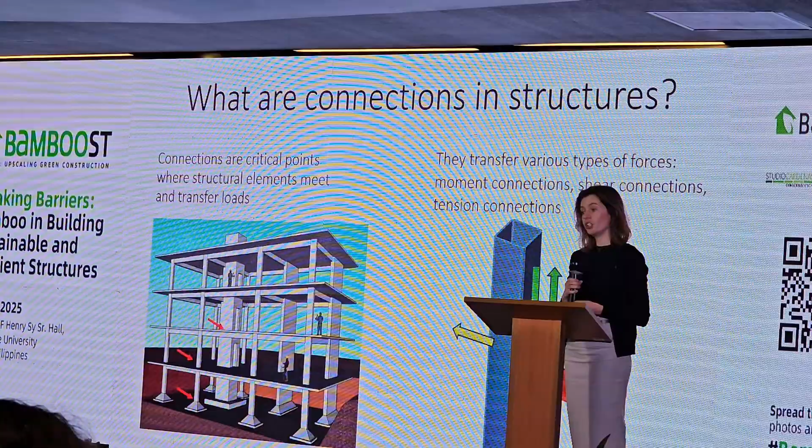Before we delve into this presentation, I want to bring us all on the same page. So what are connections actually? Structures, what are joints? What do we mean by this? So connections are critical points where structural elements meet and transfer loads. And we may, for example, have a connection between a beam and a column. And connections can transfer different types of loads. We may have tension, shear, or, for example, bending.

So why are connections important? Why am I here talking about connections at all? Connections happen to be critical failure points in structural collapses, not always, but quite often they are. And connections can cause a structure to collapse due to poor design, so connections that are not strong enough, too brittle, or not stiff enough.

Lack of environmental protection, so we may see corrosion in metals like steel, or degradation in bio-based materials like bamboo. And poor workmanship, so lack of skills, that's a big problem, and cost savings. So, for example, why do 10 screws if we can save and use only 2? So that means that in many collapses, connection failures are the root cause, even when the structural elements themselves are well designed.

What this means in practice is that, imagine that you have two shorter bamboo poles and you want to create a longer element. So you connect them at the ends, and now you want to pull those poles apart. So it's not just the bamboo strength that is relevant, it is the connection strength that has to be as strong as the bamboo itself if you want to utilize the bamboo tensile strength in that case.

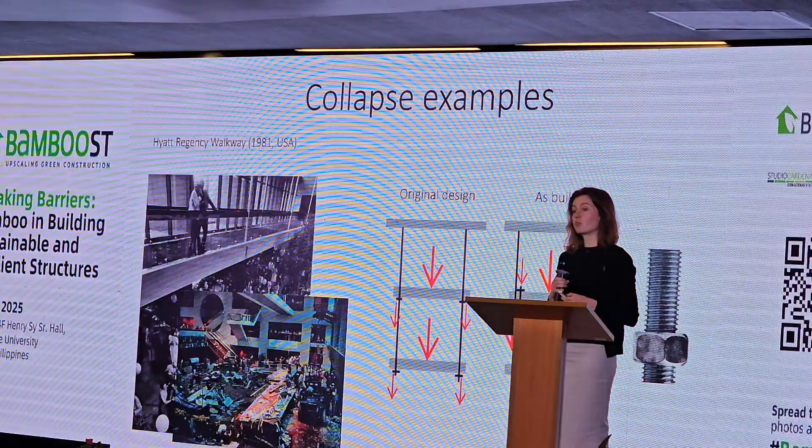So 2 more slides before we go into bamboo, I promise. This slide shows a tragic example of the importance of connections in structures. So in 1981, in a hotel in the US, 2 suspended walkways collapsed, killing over 100 people. In the original design, the walkways were supported by a single continuous rod in the connection. But in the as-built solution, there was a slight change, and suddenly 2 rods were used. And this small change caused doubling of the force on the connection, and it led to a massive loss of life.

And another example of the importance of connections is a collapse of a bridge, and here 46 people died. And this is an example of the importance of environmental considerations in your design. So this was due to stress corrosion cracking, which is a form of steel corrosion.

Okay, let's talk about bamboo. So connections in bamboo are quite tricky. We engineers like to work with flat surfaces and square corners, and bamboo has got none of those. It's round and hollow. The walls are relatively thin, about 10 millimeters, and there's not much material for the connector to engage with. And it's not uniform in size, so it's not perfectly round, it's tapered, it has nodes, and the nodes are not at the same distances, etc.

And on top of that, bamboo splits, it cracks very easily. That's because the fibers in bamboo run in only one direction. And if you're trying to insert any type of fastener into bamboo, it's very likely to split because you're effectively pulling those fibers apart. And it's not just the load, the stress that causes the cracking. It's drying itself that actually can cause bamboo to crack.

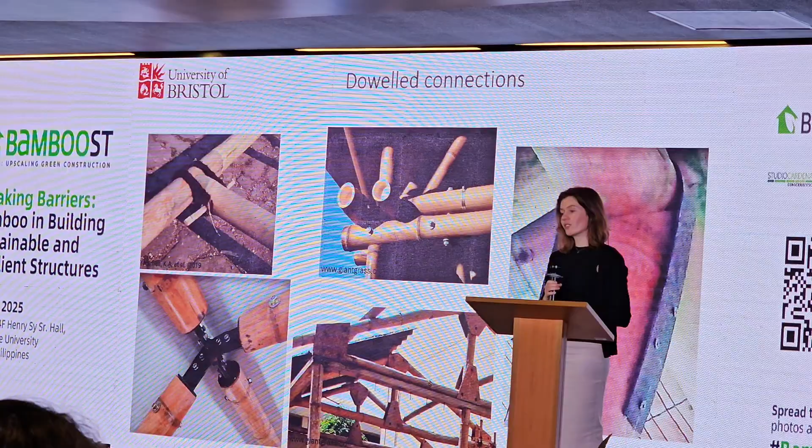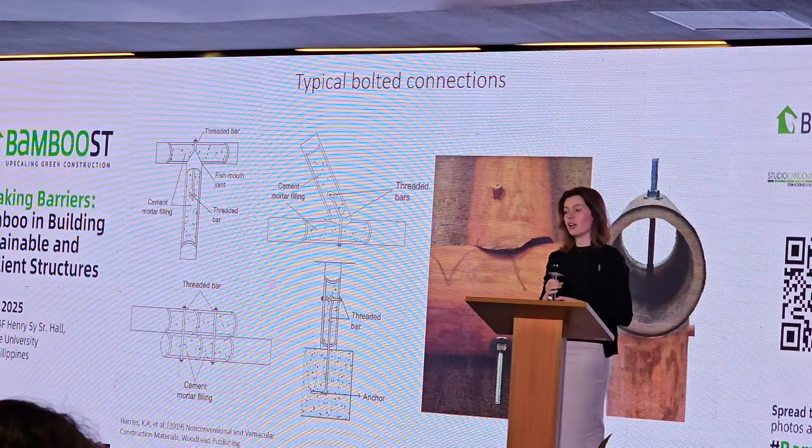And the interesting thing about this connection is that it's not just the bolt, it's the mortar infill inside the nodes. So we use that cement mortar to kind of compensate for the lack of material. So like with wood, we would have a solid section, with bamboo, because it's hollow, there's not much thickness for the fastener to engage with. So we compensate with the use of cement mortar inside.

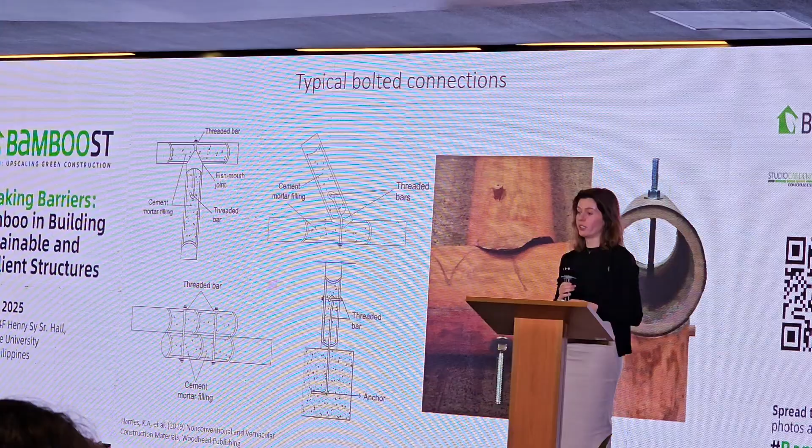And here are some pictures that I took in Colombia of this type of connection. And again, it may look a little bit different in the Philippines, but this is kind of how they do it in the place that I visited. And the cement is not always there, it kind of depends on the strength you want your connection to have. But without that, it's very likely that it might split. And you can also see how that mortar is being inserted into the internode, so there's that hole in front.

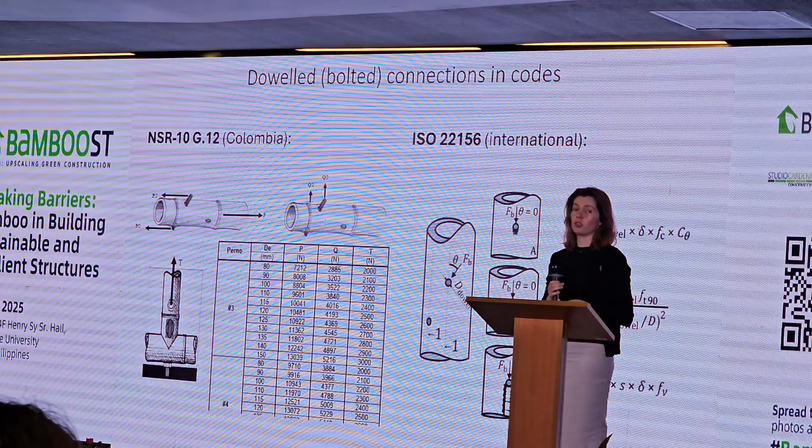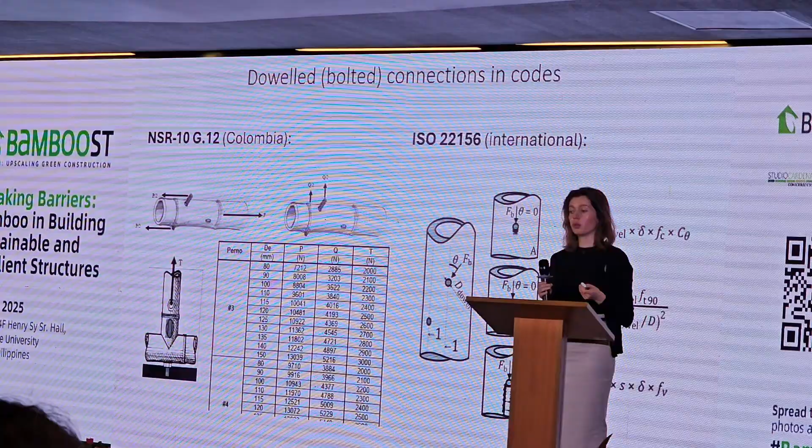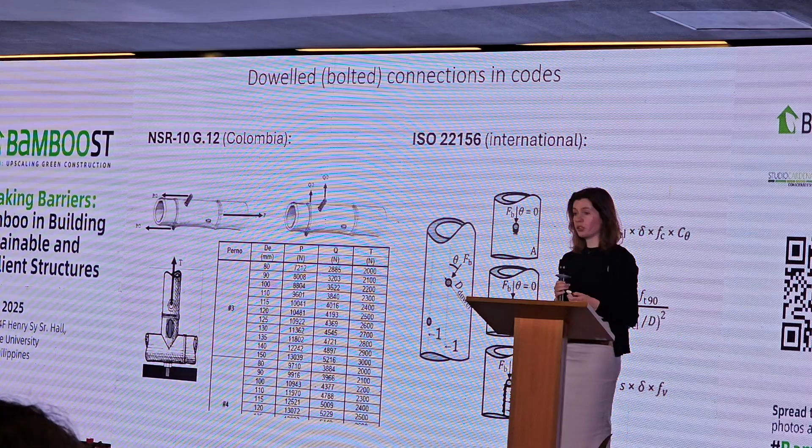So if you're a designer or engineer and you'd like to actually design this connection, there are two places where you can go. There's the national Colombian standard that we already heard about before, and there's the ISO. So the national standard is very restrictive. It only applies to one species, the one that is commonly grown in Colombia. It's prescriptive also in the sense that it only works with specific sizes of the bolt and the bamboo itself, while the ISO is much more versatile. So you can kind of play with your connection, and you can play with the geometry more. It gives you many more possibilities to adjust that connection to the needs of the project. As long as you know the material properties of the species that you're working with, you can use those equations.

And so is there any problem with those bolted connections? Well, since I have a slide, there probably is, like with any kind of connection for that matter. And it's the cement really, and why is it a problem? It's not always a problem, but there are a few things about cement. First of all, because you add it to the inside of the node, if you've got quite a few connections in your structure, you may find that it adds to the weight of your structure, and the weight then adds to the requirements for the foundations. So the cost is higher. It may be the time that it takes for the cement to set. It may be that it's not available, although availability normally is not an issue. But the one big thing about cement is its environmental impact.

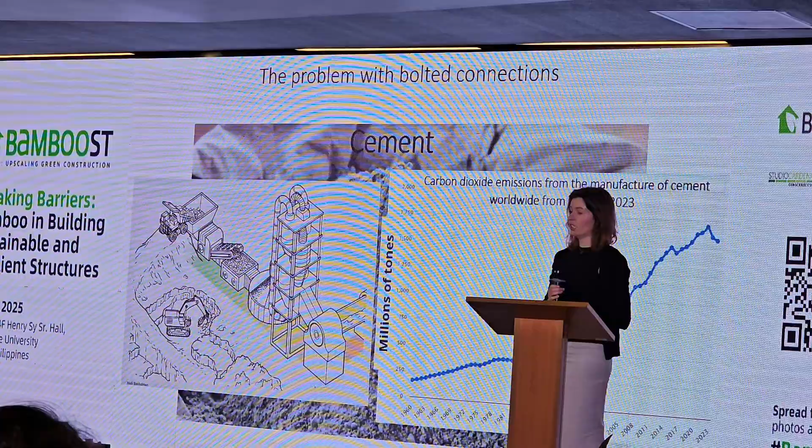Cement has high embodied carbon, which means that in the process of making cement, there's quite a lot of carbon released to the atmosphere. We know all about climate change, and we don't really want to be releasing even more carbon. So cement is made using very high temperatures, and to create this energy, normally it's fossil fuels that are being burned, and they release that carbon to the atmosphere. And on top of this, when cement is being produced, there's a chemical reaction happening, and that also releases carbon to the atmosphere. About 50% of the whole carbon emissions in cement production actually come from the process reactions, so that chemical reaction happening.

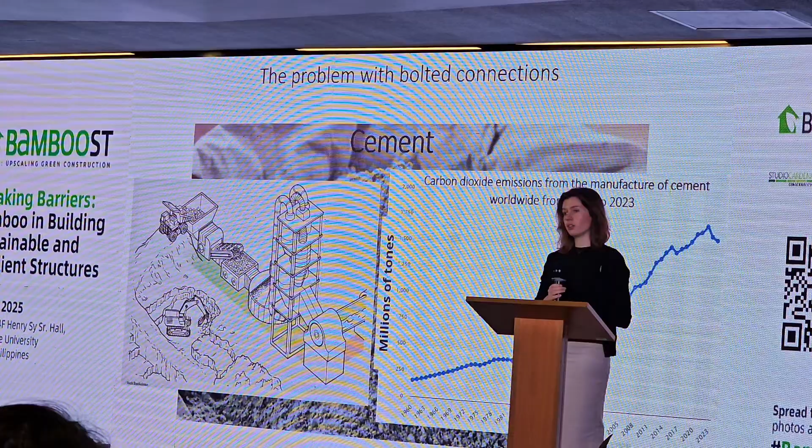So that's, let's say, the issue with this typical connection method, and we're trying to find different connection types where maybe we don't have to use that cement. So what about screws? Screws are very commonly used in timber structures. So we're talking about wood screws, because you cannot really use those screws to drill through steel. There are different types that you can, but this piece of research focused on the screws that can be used for wood.

And so I did my PhD in this, so this is kind of a little bit about those lab tests, the experimental testing. So I did around 250 tests with different number of screws, and those tests were done in a

I have to leave the microphone.

Okay, so I used different number of screws, and the tests were done in shear. So it's a kind of lateral loading of the connection, and I used different arrangements of the screws. So we can have them in line along the fiber direction. Probably not a good idea, as we will see in the next slides. And we can also have them staggered, so having them on different fiber lines. I used different steel plate thicknesses, thinner and thicker, to see what the impact of that is.

And different materials, so typical screws are made of carbon steel, and the problem with that is that in the process of making the thread, the hardening process makes the screw a little bit brittle, quite brittle actually. So depending on the design, as we will see, it actually may be brittle, and we don't really want brittle failures. And stainless steel, it's a little more expensive. It's very ductile, so it's very good for ductility, and has good corrosion properties.

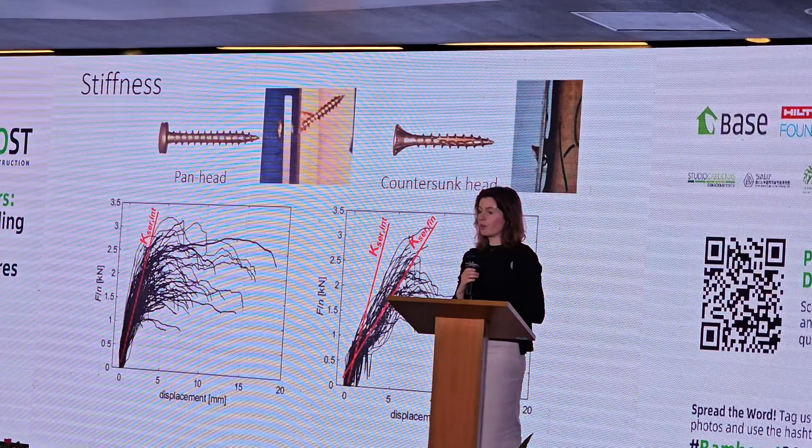And before I talk about the strength of this connection, two more important things are stiffness and ductility. So stiffness tells us how much force the connection is taking as it displaces, and it's important in any structure because stiffer elements in your structure attract loads. So if your connection is not as stiff as you thought, the load path may be different, and the loads will go to a different part of your structure. So you may get failure in a different place.

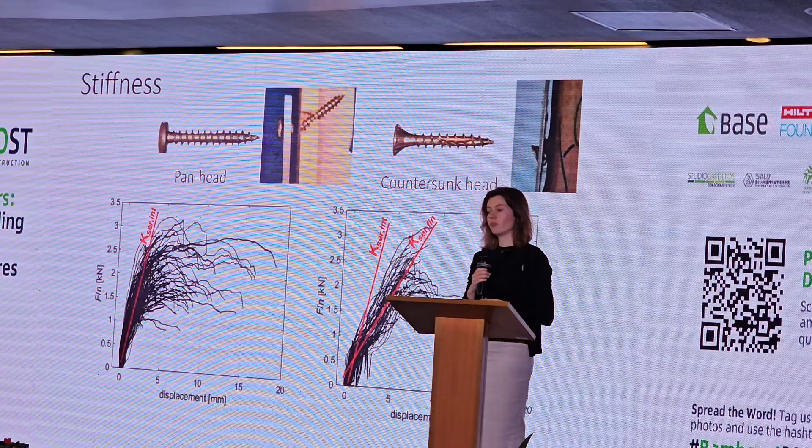So what I saw here is that the head is probably the most important factor. With the countersunk head, if the plate is countersunk, then the head can rotate, and that... We also found that the more screws you use, the stiffer the connection is, which is a very promising finding, because we are thinking of using not just one screw. You will never use a connection with one screw. The connection will definitely have multiple screws. So the more we can add, the stiffer it will be, which is a good thing.

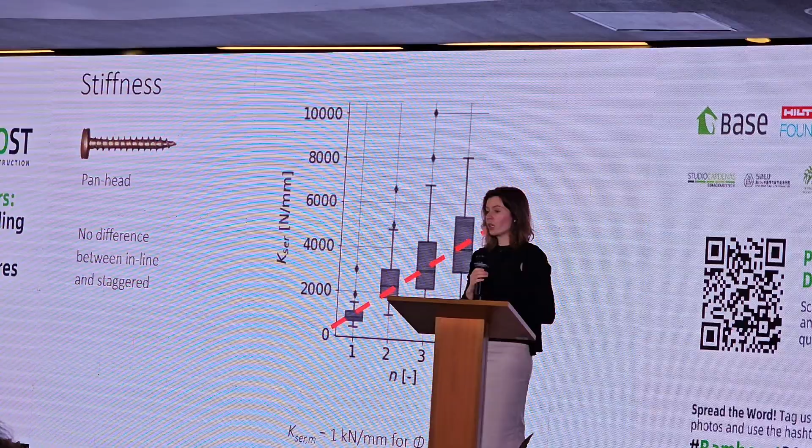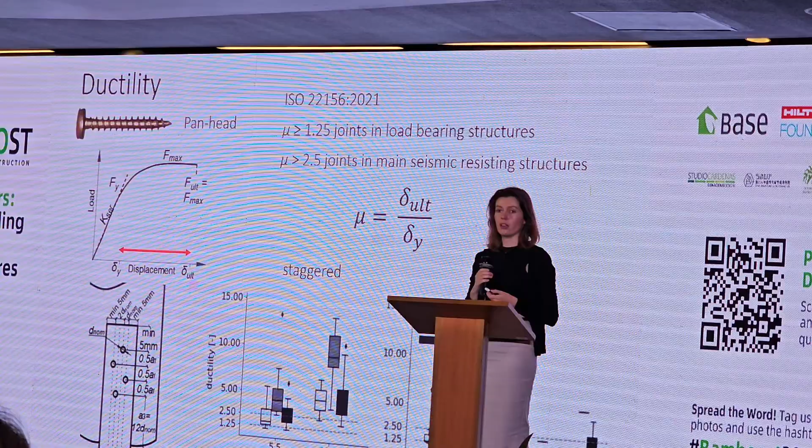And ductility. Another important thing, apart from stiffness and strength, is ductility. And ductility tells us how much the structure can deform before it fails. And that's very important because it gives us a warning. It's like a warning sign for the occupants of the building, so that they can react. And so the ISO that I mentioned gives us some minimum requirements. I don't want to go into details about the ratios, but basically what I saw is that we can easily exceed those requirements using good design principles in screws, so having them staggered, not in one line.

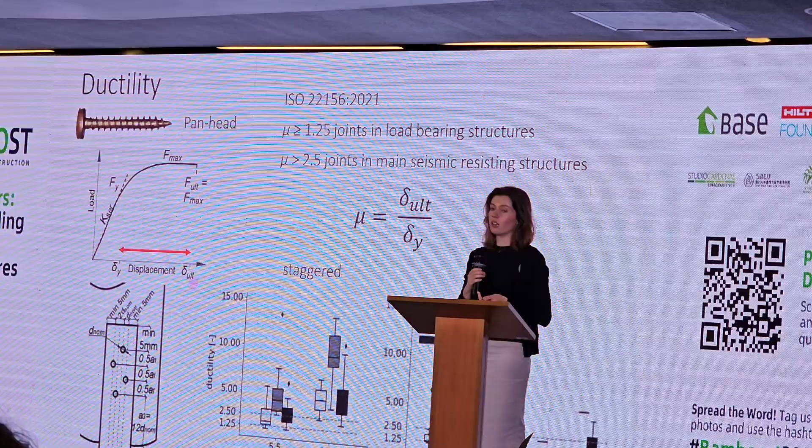And just so we can visualize why this is important, imagine you're in a room and you're looking at the ceiling and there is a beam that is deflecting. So you see it every day that it's deflecting a little bit, you have some time to react, while imagine that the same beam doesn't deflect at all and just suddenly it breaks. It's probably too late to act to escape. So it's a very important consideration in the design.

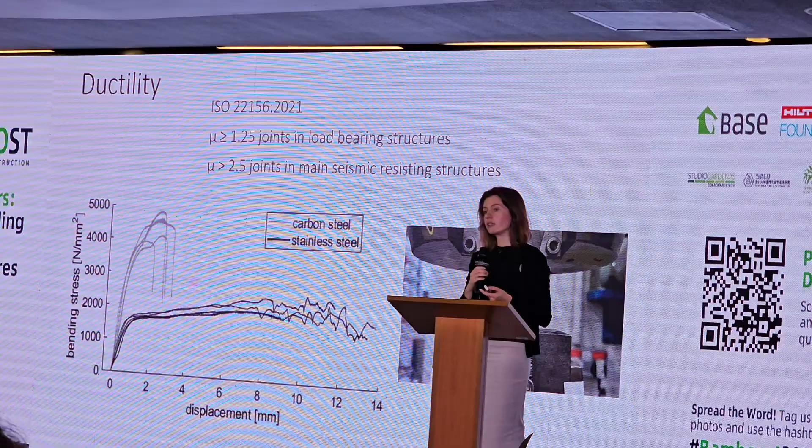And as I mentioned, stainless steel is much more ductile than carbon steel, so you can easily get good ductility with stainless steel. It comes at a cost, because first of all, it's more expensive. But also, there is a risk of corrosion with stainless steel, even though stainless steel has good inherent corrosion properties, but if you use it in conjunction with carbon steel, you may get galvanic corrosion, so it's something also to consider.

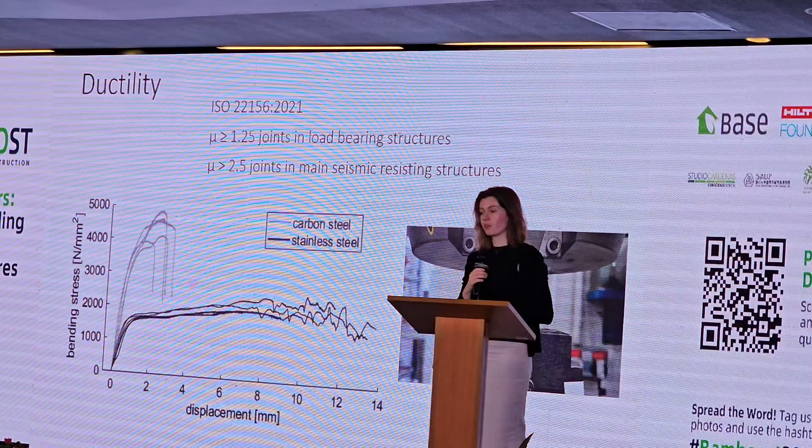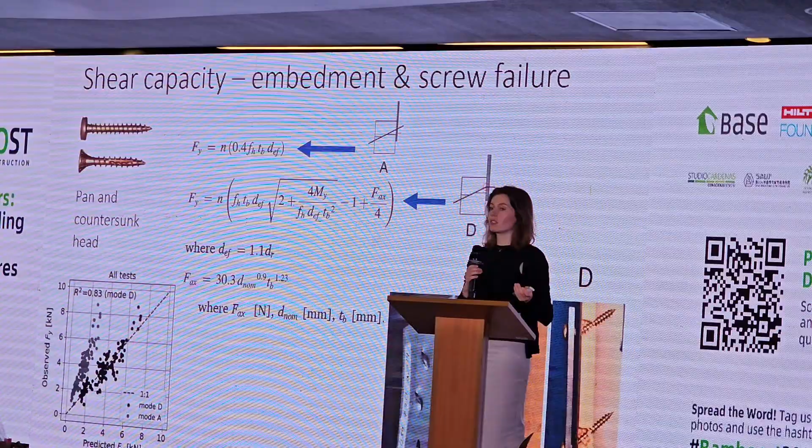So again, it's very good news for bamboo in general, but also for this particular connection. It gives us some certainty that bamboo can be modeled using existing methods, so we are not really so lost in the understanding. We actually have a lot of understanding already about bamboo.

So the key insight from this is that you should never really have screws close to each other in one line, so one above the other, because that very much causes fracture. We don't really want fracture; it's a very brittle failure mode. There's no ductility, so there is no time to escape. The good practice is to have the screws staggered, so we don't have any two screws sharing the same fiber. This is likely to give us good ductility.

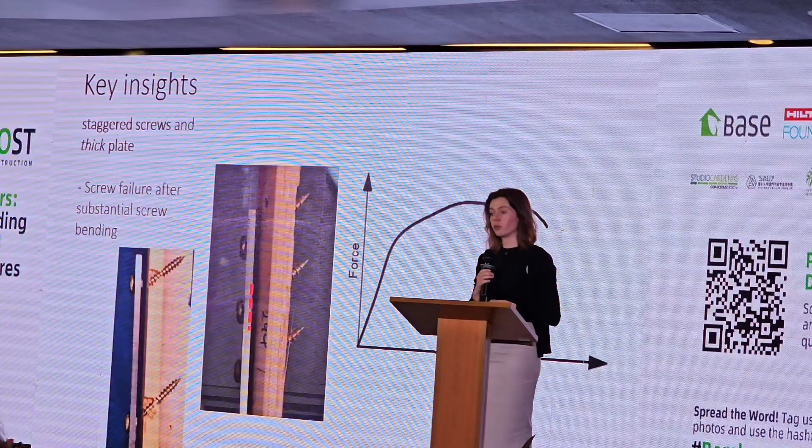If your screws are staggered and you use a relatively thin plate, you are likely to see screw withdrawal, which again is a very good failure mode, because it's very slow, so there's a lot of ductility. And if you use a thick plate, again it's a good failure mode because you have screw bending, and that's again a very slow failure mode. So you can see we do see a lot of ductility.

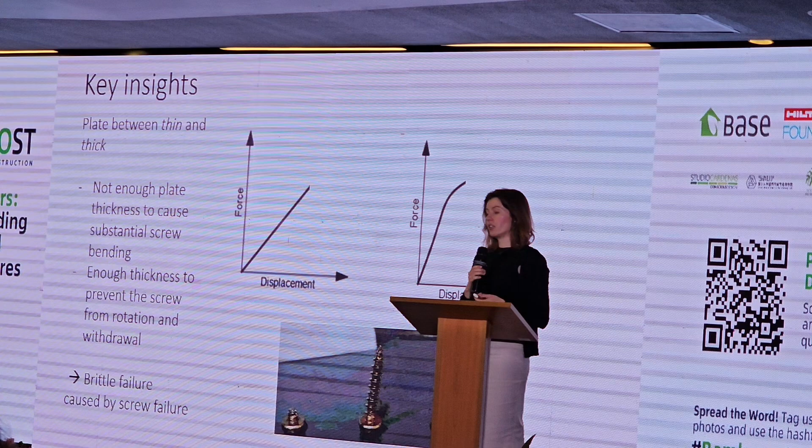The gray zone, where you are in a risky zone, is where your plate is not really thin and not really thick, it's somewhere in between. I didn't mention this, but thin and thick come from the Eurocode 5 names, and this is in relation to the screw diameter. In this gray zone, there is not enough plate thickness to cause substantial screw bending, so you won't get a lot of ductility. But there is enough thickness of the steel to prevent the screw from rotation and withdrawal. So again, you will not get the ductility from withdrawal.

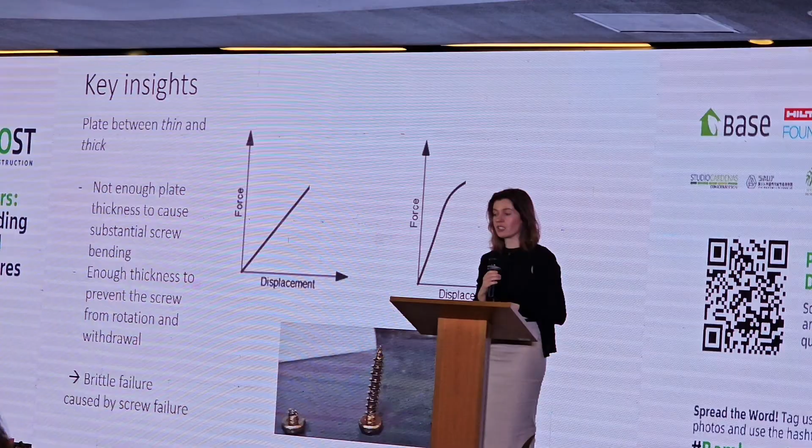And what happens is that the screw bends a little bit, gives a little bit of ductility, probably not enough, and then it just fractures. This is specifically relevant for carbon steel screws, which are the typical type of screw. So the location of the screws is really the most important thing if you're ever thinking of designing using screws in bamboo. I want to focus a little bit on fracture as well, because this is really a key problem for bamboo in general, but also for connections.

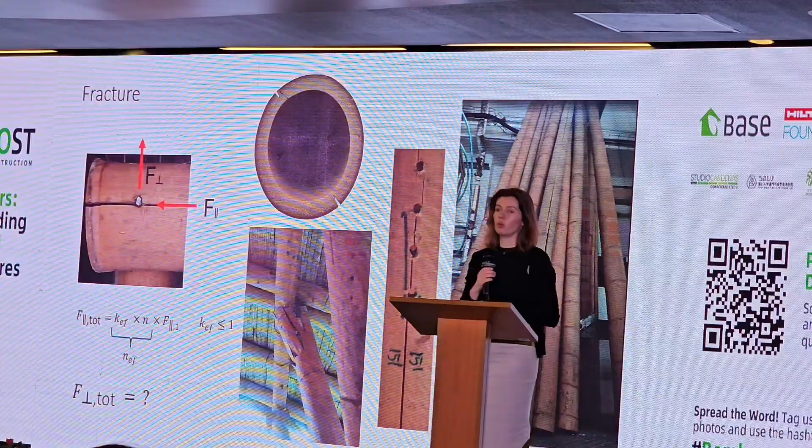Until now we talked about parallel loading, that's the F parallel on the slide, and I want to talk a bit more about what happens if you load it in the other, perpendicular direction. Maybe you've seen it if you've seen any bamboo structures. Quite often they use steel clamps, normally located near connections. And there are two uses of those clamps. One is to prevent the splitting, the cracking, from happening. You can tighten that clamp, and it will introduce compression loads on the bamboo. And the other use is post mitigation.

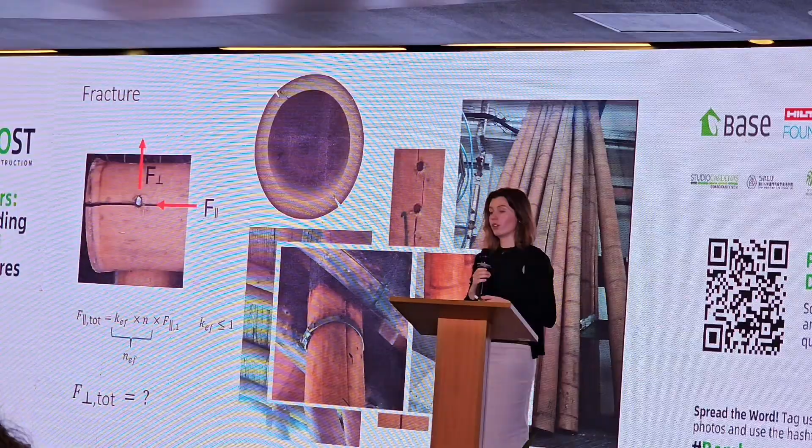So once the crack happens and you don't want the crack to progress anymore, you can also use a clamp to introduce those compression stresses onto the bamboo. Those were tests done at another university in the UK, Coventry University, by a student, and we looked at those tests to see if we could get some kind of equation or prediction model. Surprisingly, we did, and it was quite a good model.

It's quite accurate, and again, it uses existing timber design. So it's not anything new. We are not reinventing the wheel here. We are using existing models, and we adjust them for bamboo. In that case, the geometry is very important because it's very different from timber. So taking into account the geometry and the bamboo-specific properties, we got a very simple equation that predicts the fracture, the splitting capacity of this connection loaded perpendicular to the fiber, just using the thickness and the diameter of the bamboo.

So to finish off, I'd like to show an example of how this connection could look, but also how it compares to the traditional connection with the bolt and mortar.

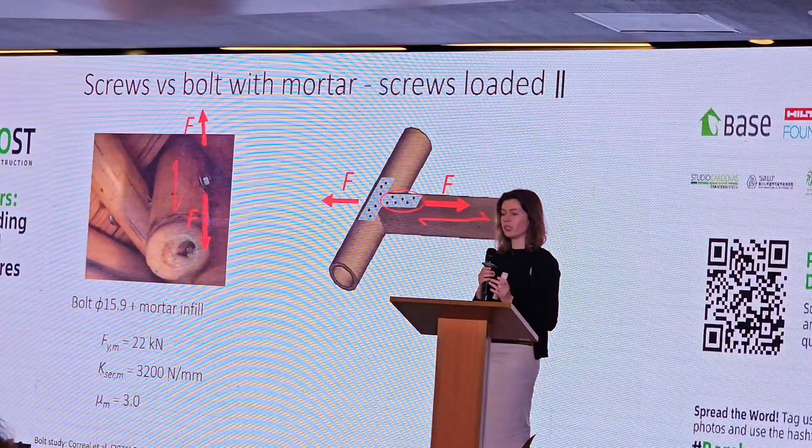This study about the bolt is from Professor Correal in Colombia, and they did a bunch of tests on a typical connection, and they found that the mean, the average strength, is about 20 kilonewtons. So keep this number in mind, 20 kilonewtons. If you wanted to match this strength using screws, you would need 6 screws of 4 millimeter diameter, which is a typical diameter used in timber, 6 of them on either side of the bamboo. There's another plate on the other side that you cannot see. So this is matching strength.

Now, what about stiffness and ductility? Stiffness is that K-ser, the second one. What we see is that screws have at least 30% more stiffness, likely much more if tested. The 30% more is based on the tests that we did on the first screws. And in terms of ductility, that's the last line, we can get much higher ductility with the screws. And again, this is great news. It seems like we are actually onto something.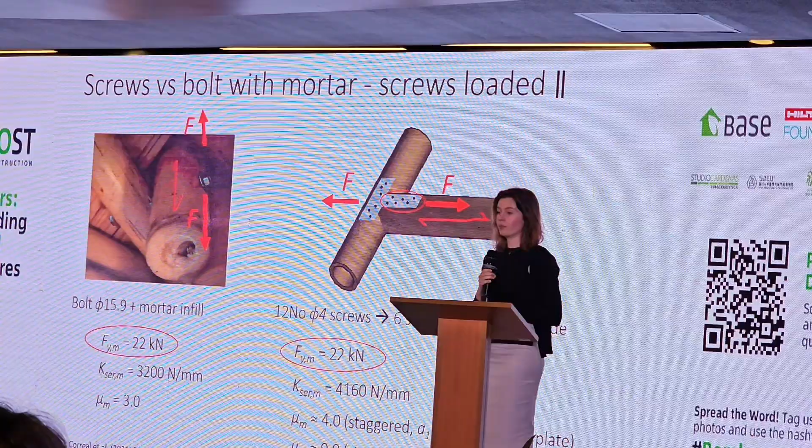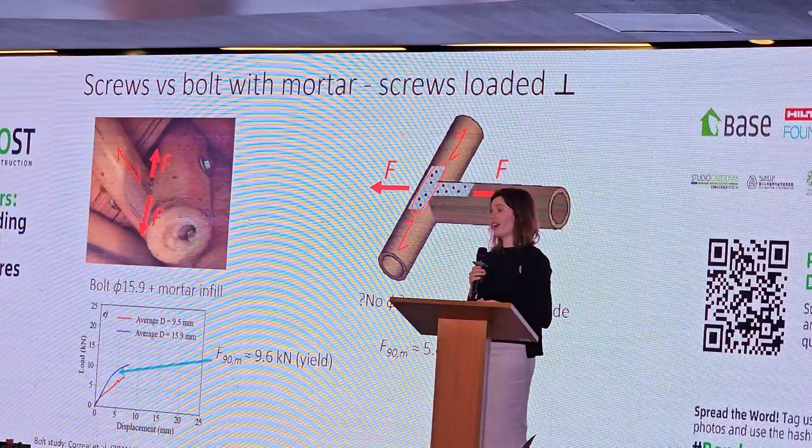So that's the loading parallel to the fiber that I talked about for most of this presentation. What about the perpendicular load? This is the tricky one. That study I mentioned found the capacity is about 10 kilonewtons. With screws, we can only get around 5, and the reason is that, at the moment, as long as the screws are near the center line of the bamboo, you cannot really increase the number of screws. It's just one crack line, and it's just 5 kilonewtons that we can get.

There are a lot of assumptions here. Maybe it's 4, maybe it's 6, but it will be quite difficult to get it to 10 without more research. So this really highlights the need for more research. It's not that this connection cannot be utilized in this direction. It's just that we have to think about this strategically, placing the screws, and again this requires tests, funding, time, labor, etc.

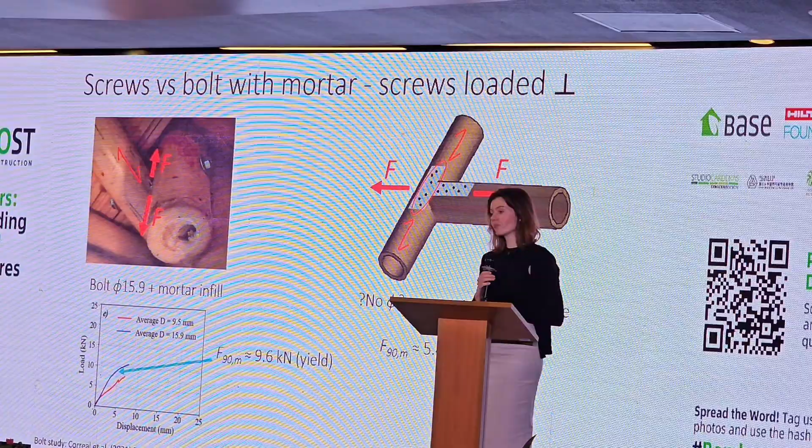If you'd like to know more about this or see the proper guidance, this was very much on the surface, but everything that I talked about has been published in The Structural Engineer, which is a magazine for practicing engineers in the UK, and it's available online, I believe. And why I'm saying this is that this magazine is based in the UK and is read mostly by UK-based engineers. We don't grow bamboo in the UK. We don't have any permanent structures made of bamboo, and yet they were interested in publishing this.

I think it really highlights that it's a good time for bamboo, not just here in the Philippines, but even in places where it doesn't grow, and it will probably take years until bamboo is actually used in Europe. But I'm very excited about this because I feel like if there's a demand, the supply will follow. So we need to start this in Europe, and I'm hoping to see more guidance, more funding, and more people interested in bamboo.

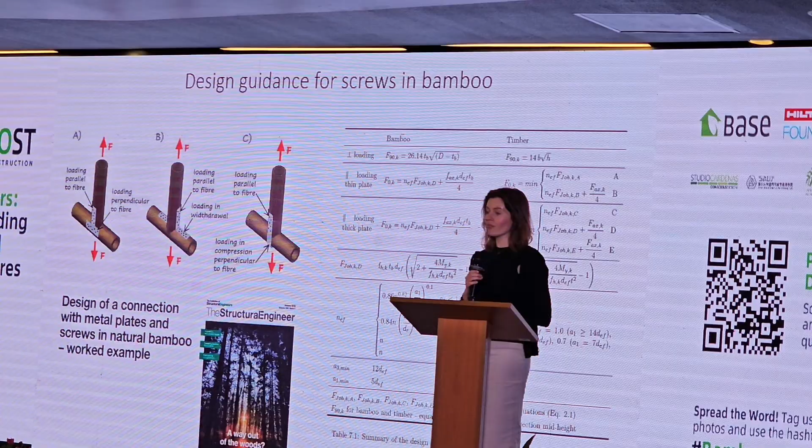So what next? There are still issues. Fracture is a really big issue. We need more funding and more research to understand how we can mitigate against it, what we can do so fracture does not happen. Then the practicalities of how this connection would actually look. There are various ways that you can have steel plate screws. If you're a designer, you might have much better ideas than this.

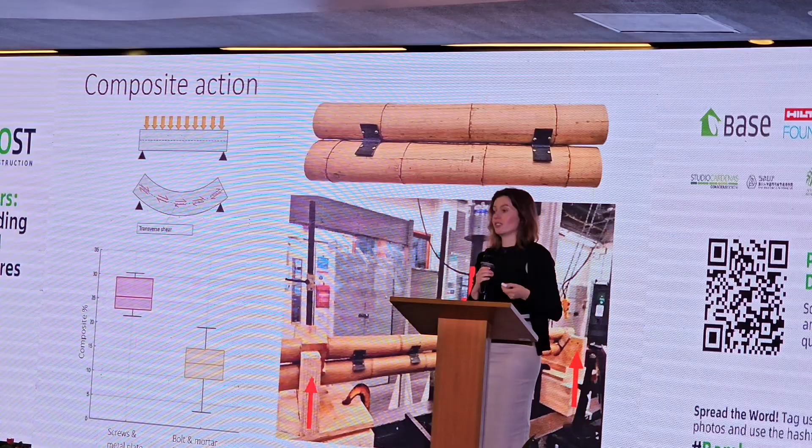And other uses. Interestingly, because we saw really good stiffness in this connection, I thought, what about the composite action of having two bamboos connected together and used as a beam? We did some tests with a student in Bristol, and it seems that the stiffness really helps, and we see much higher composite action compared to the typical connection with bolts. I'm not saying we're there yet, but it's better. So again, it's good news. And I think that's my last slide, so thank you very much.